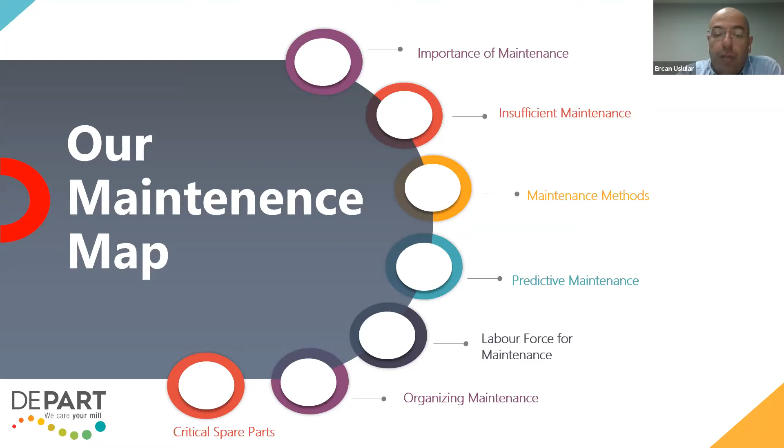What we are going to talk about today: we will talk about the importance of maintenance. Then we will follow up with what happens with insufficient maintenance. We will also talk shortly about the maintenance methods, which you all already know. And we will focus on predictive maintenance, our main topic, and also the effect of spare parts, labor force, and organizing the maintenance.

When we speak generally about maintenance, as you all know, it plays a big role for a company, both for production efficiency and from the financial side. Especially breakdowns for the technical teams. Breakdowns are our nightmares. As technical teams, when an incident happens, we are always trying to fix the incident on the machinery as soon as possible. But on the other hand, while we are focusing on that point, the management side always looks at the financial losses because of these breakdowns.

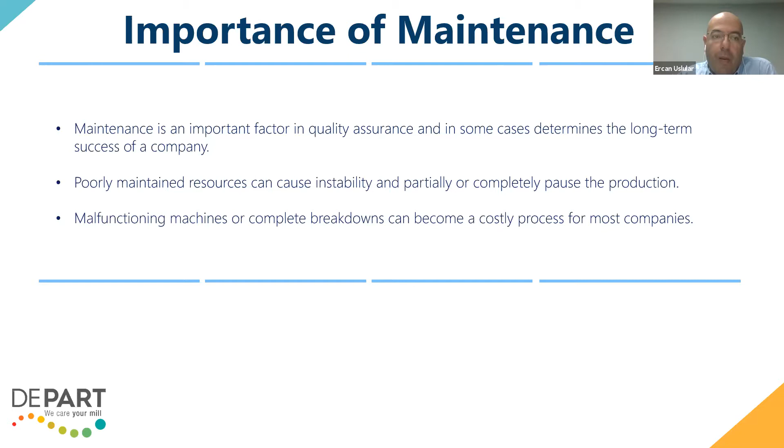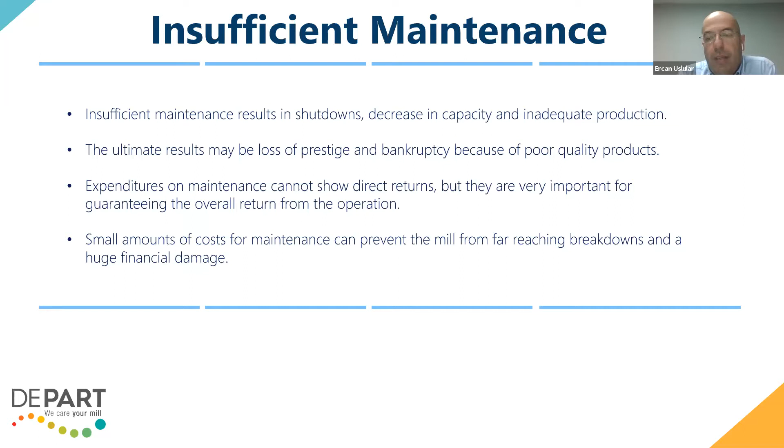And when you look more specifically at these incidents, you will see that these breakdowns mostly occur because of insufficient maintenance. And yes, maintenance is a cost point. We are always spending something, but we should not expect that the cost spent on maintenance will show us direct returns.

I will just give an example of insufficient maintenance. As you will see on the screen, there are some rollers which we have taken from different mills during our checkups. And as you see, there is some wear on the rollers. During this checkup, we directly make some reports. And in those reports, we basically mention that for these cases, at that wearing level, they should send the rollers for fluting.

Otherwise, if they keep using them, the wear level will increase so much that you will not be able to use these rollers anymore. And this will help you to reduce your preventive maintenance costs. It is just an example, just to make it clear.

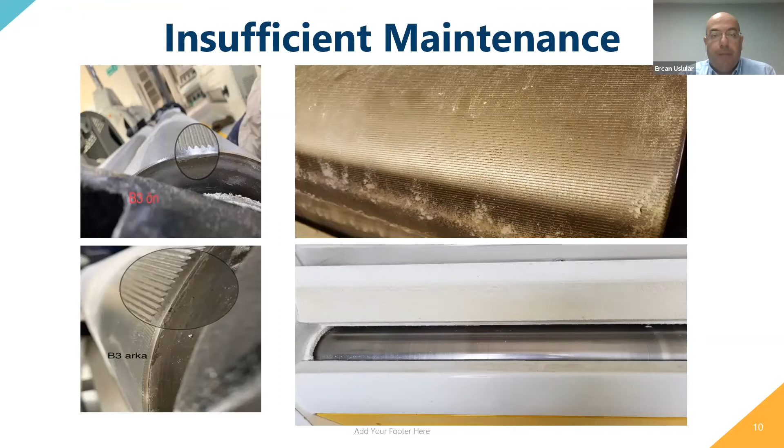Let's go a bit more detailed with the maintenance methods. In some articles and searches, you see different naming for the maintenance types. Actually, maintenance can be divided into two parts: reactive and proactive. Proactive is also divided into two parts: preventive and predictive maintenance.

We will also focus on predictive maintenance, but in some articles there's also different naming. For example, reactive is called failure-based, preventive is age-based, and predictive is condition-based.

After some research, results show that for reactive maintenance, you are too late for the incident, and for preventive, you are too early. Why is predictive so famous at the moment? With predictive maintenance, you are right on time.

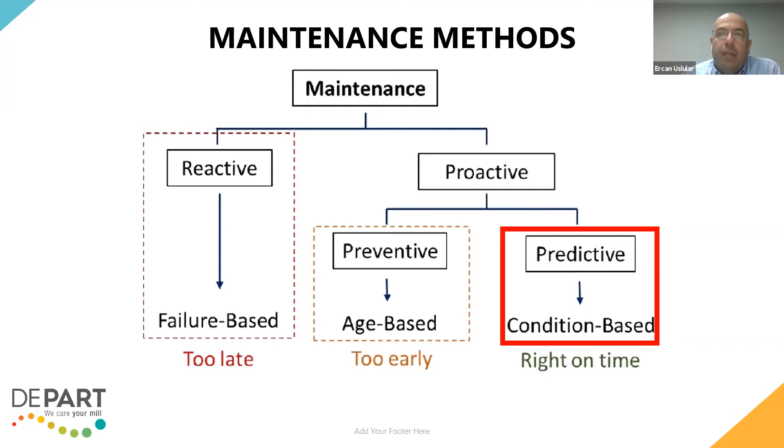So here's something about the terminology. I put this on the slide because I was surprised when I read that this terminology began in Turkey in 1988. I was really surprised, because nowadays it's very famous.

In 1988, one professor named Mr. Kubilay Köse announced this in Turkey as 'kestirimci' - this is Turkish, but it means predictive maintenance. Maybe in those days, people didn't take it as seriously as today.

So we say predictive this and that - what is predictive maintenance? Maintenance is monitoring the data taken from the machinery to detect possible breakdowns and prevent downtimes caused by unknown and unplanned maintenance activities.

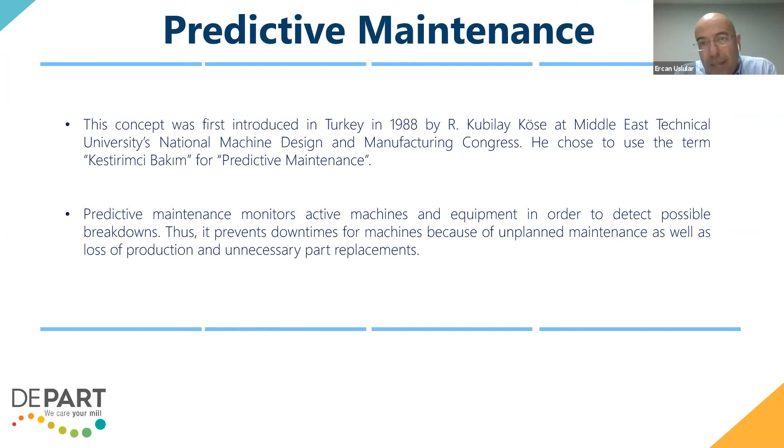Before getting to the numerical analysis, I read an article from Steve Carr. He made some surveys about predictive maintenance and maintenance issues in general, and mentioned that in one survey, the actual cost for a breakdown is between 4 to 15 times the maintenance cost.

He also says in another survey that the cost for a machine breakdown is not only the cost of repair. As technical staff, we only calculate the repair cost, but the stopping time, the inability to produce product, and financial losses should all be calculated in that cost. When we look at some academic analysis, we see percentage reductions.

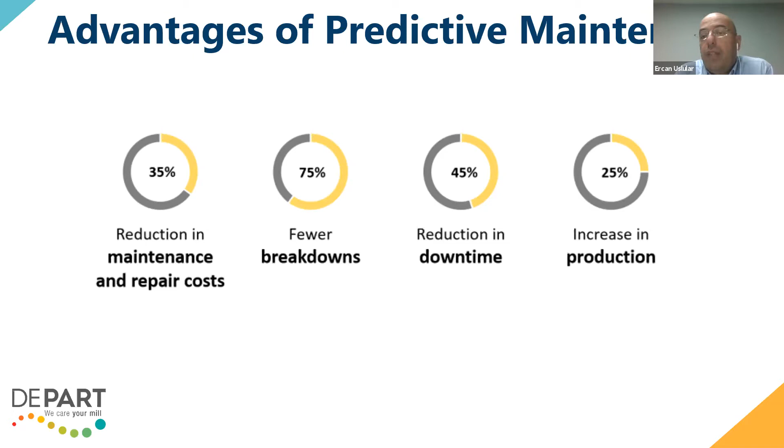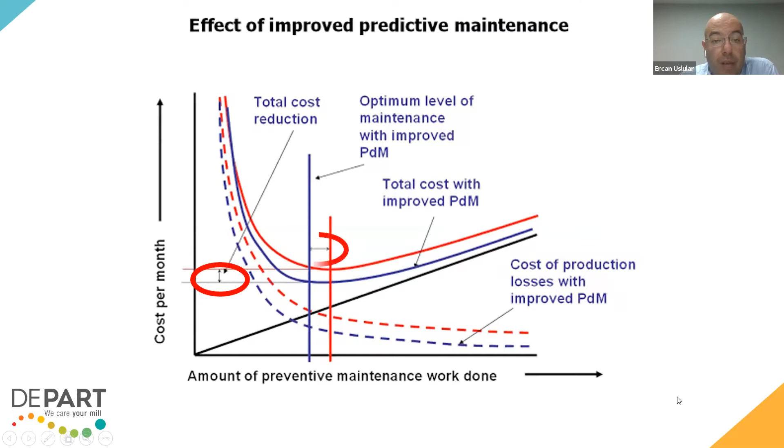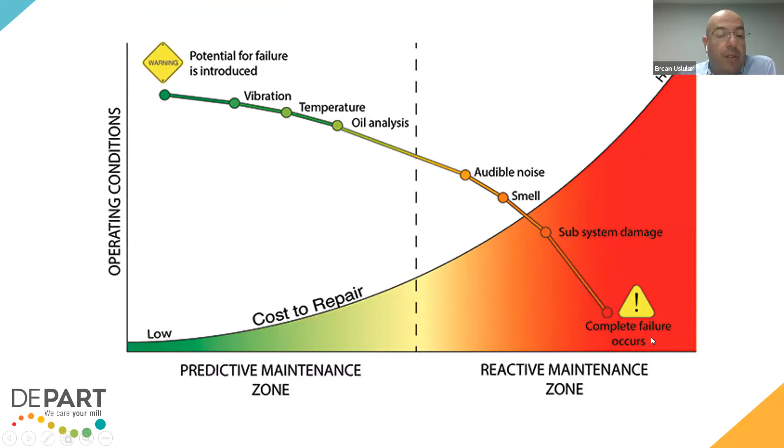When you go further and it goes more deeply, you start hearing an audible noise, maybe a smell, and then it damages not only the parts but also the subsystems, and complete failures occur. So I'll give you a simple example: in your mill, the plansifter has a top bearing.

You will increase the lifetime by observing such data, vibration, temperature, and if there is a needed change, then you will change only the bearing with a minimum stopping time. Approximately, just to give an approximate value here, the bearing and the labor will cost you approximately 400 euros.

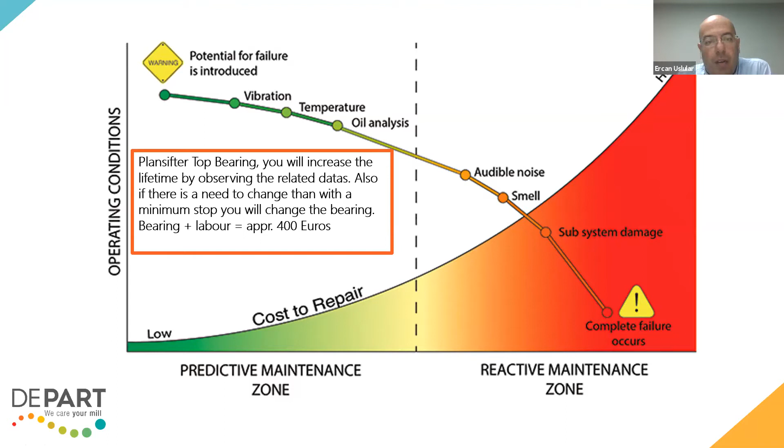But when you do not observe the data, then the bearing will damage. It may also damage the housing, maybe the main shaft, etc. It will be a follow-up, so surely you will go to bearing, housing, labor, and then you will have more than 1,000 euros cost.

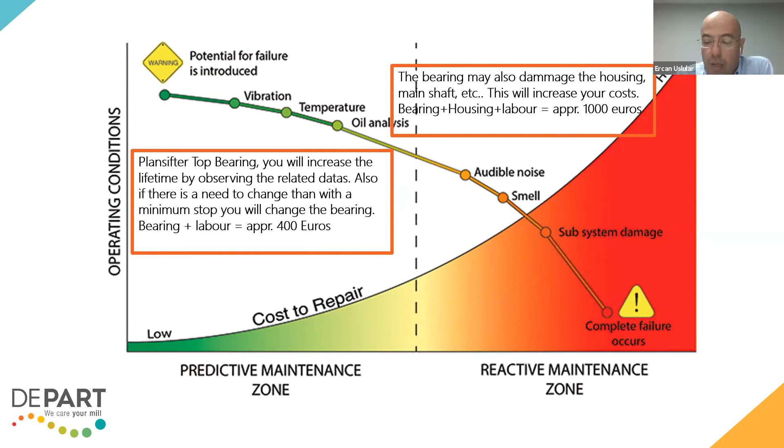And you will see also in the graphic, I mean predictive, when you apply predictive maintenance on your mill, surely you will save lots of costs from the financial side.

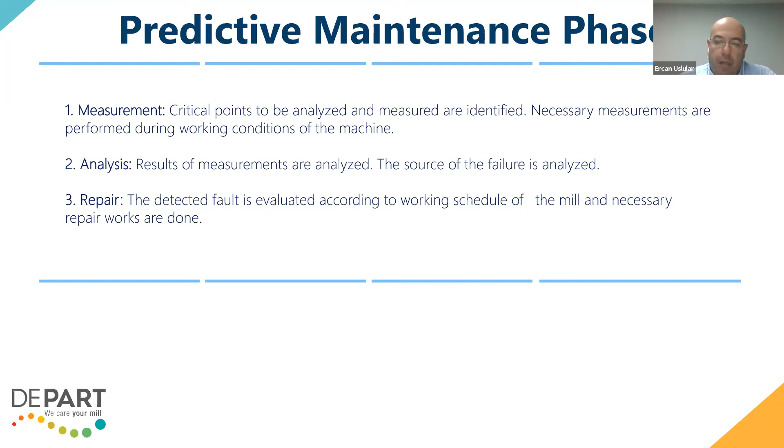So let's create our predictive maintenance. Predictive maintenance actually has 3 steps: these are measuring, analyzing, and at last repairing or maintaining. So first of all, here's a sketch.

First of all, you should decide which equipment or machinery you are going to monitor. After that, from this equipment, according to its characteristics, you should decide which data you will take, vibration, temperature, like this. And then you should start to begin collecting this data.

But only collecting the data will not be enough. You should process and analyze this. That's why your staff should be very expert on it. Then, after your collected data is logical, then you start your actions.

Actions means you start planning your maintenance. Also, in some of the mills or factories, they are using ERP on the system. And you can also, for example, store this data in a cloud or in your own server.

And after analyzing this data, you can make, via a program in the ERP, automatically give tasks to your maintenance team. They can give some, for example, you get a message: okay, go send to the night shift, this bearing from this machine should be changed, like automatic messages.

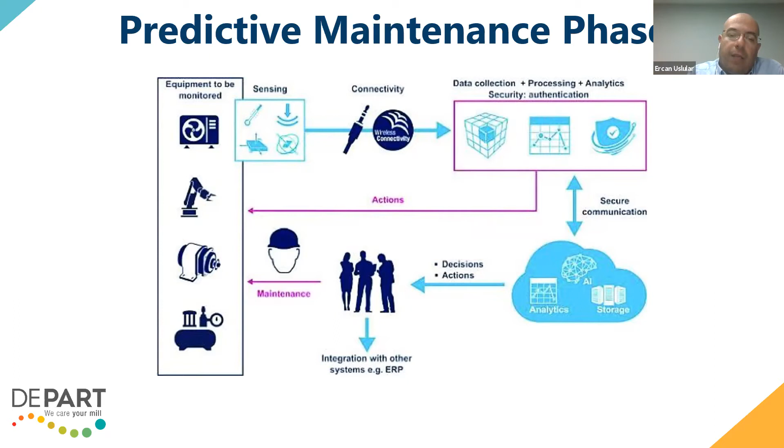So as I said, the labor force is very important. Why is it important? Because analyzing this data is not so easy. That's why if you do not have a sufficient team, you should consider outsourcing the support by making some service contracts. And also your teams, if not well qualified, you should train your team.

Training your team is very important, and the level of training is very important. You should follow up closely on these trainings.

And as I said, if you are not able to make this analysis for the predictive maintenance, not only for the predictive maintenance, maybe sometimes with your team you are not able to reach the speed for the stopping time for the maintenance. That's why you should make some service contracts for making your life easier.

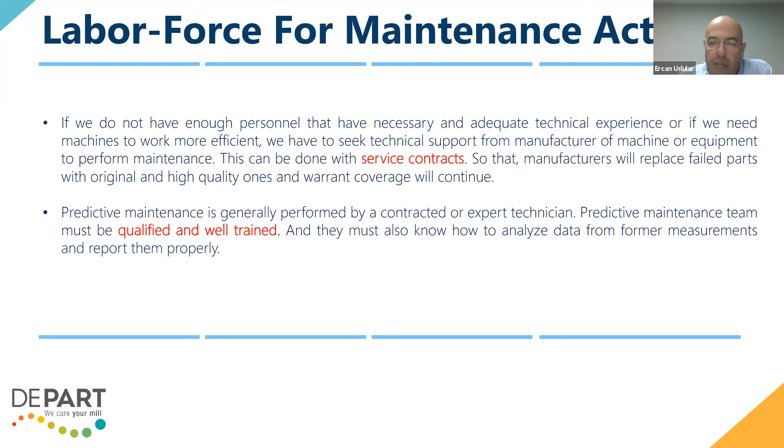So we decide which equipment we are going to monitor, we analyze the data, and now we will go into the action.

Firstly, we should make a maintenance schedule, an inspection schedule. Then for each machinery we should prepare some reports, some forms. In those forms should be written the specifications, manufacturer's data, etc. Also related with the equipment, we should keep from the manufacturer the spare part catalogs, user manuals, maintenance manuals, if there are, just for making our maintenance team's life easier.

Then this can be the production manager or the maintenance manager, it depends on who is dealing with the maintenance issue or who is reporting these maintenance issues. That person must keep records of each inspection result and part replacement during the works.

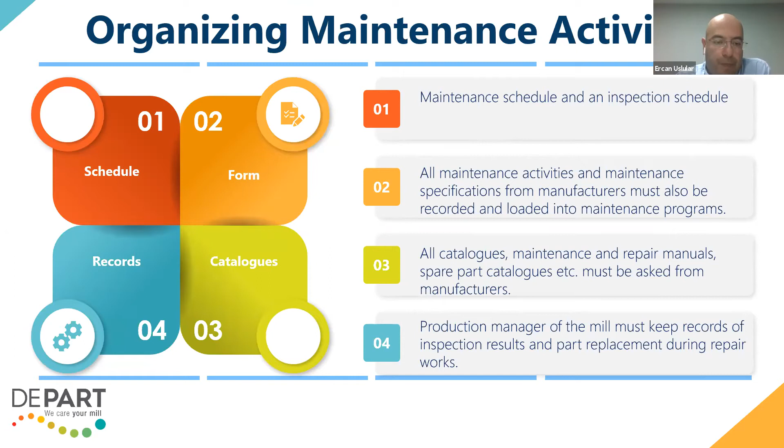So, actually, before I give the microphone to Mr. Sercan, this was a really short and brief explanation about predictive maintenance. I would like to say, as a result of this, the cost of downtime has a big impact on profitability. World-class companies are already implementing new service business models to change the maintenance system into predictive maintenance. I want to just inform about this.

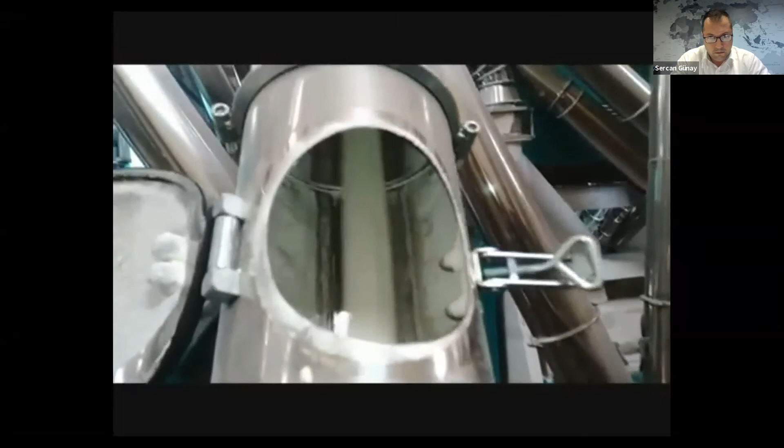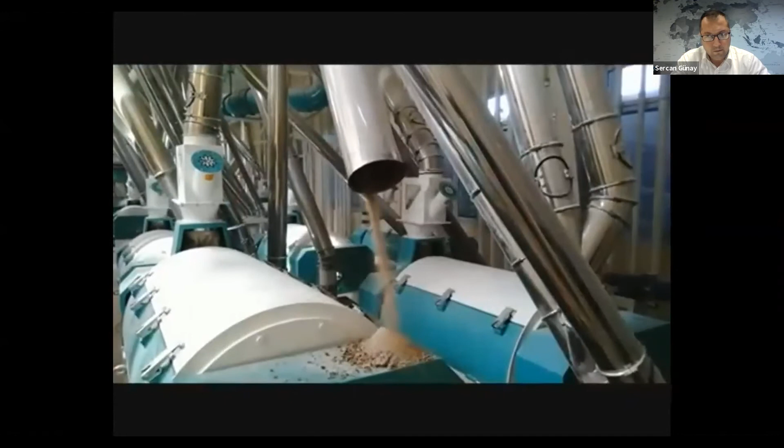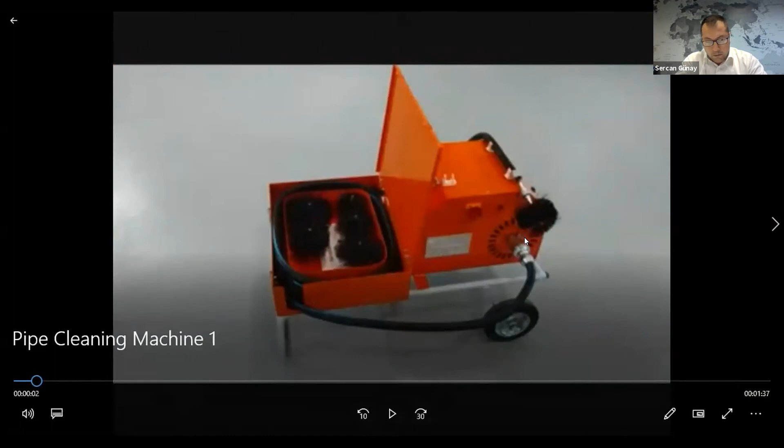So this is our pipe cleaning machine. This machine can clean pipes easily up to 8 meters.

Maximum cleaning diameter is 30 centimeters. Along with this machine, we supply 3 soft and 3 hard brushes in different diameters free of charge. If you have any interest in this machine, please do not hesitate to write us. I would like to proceed with our other video for the jet filter sleeve cleaning machine.

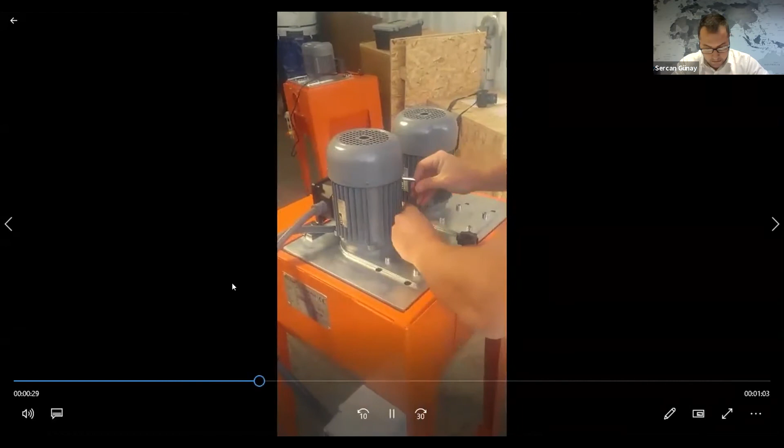So this is to adjust various sizes of brushes into the machine.

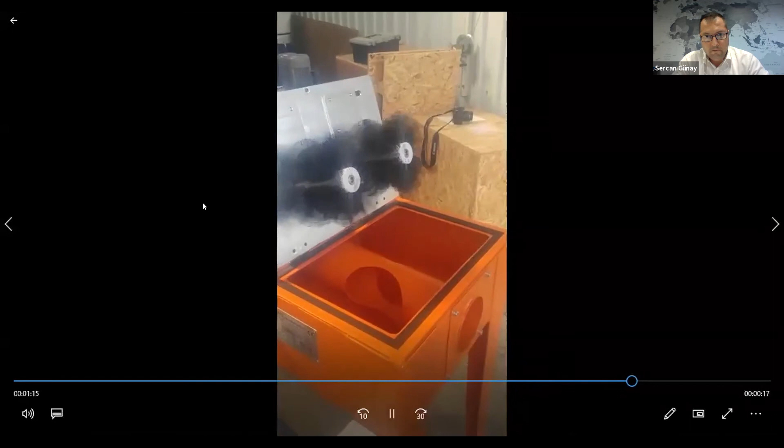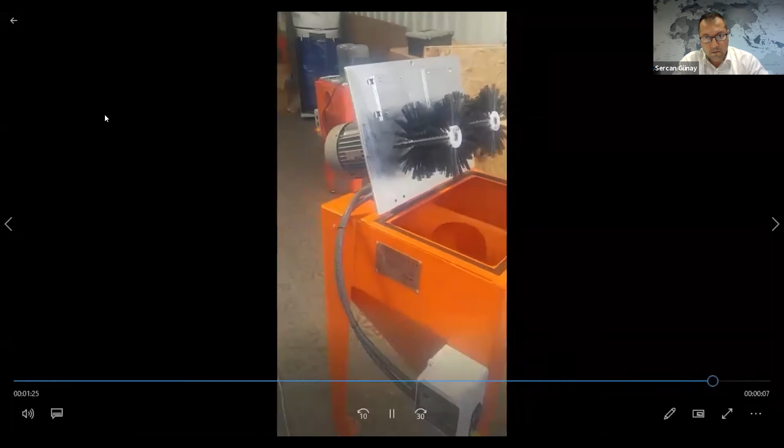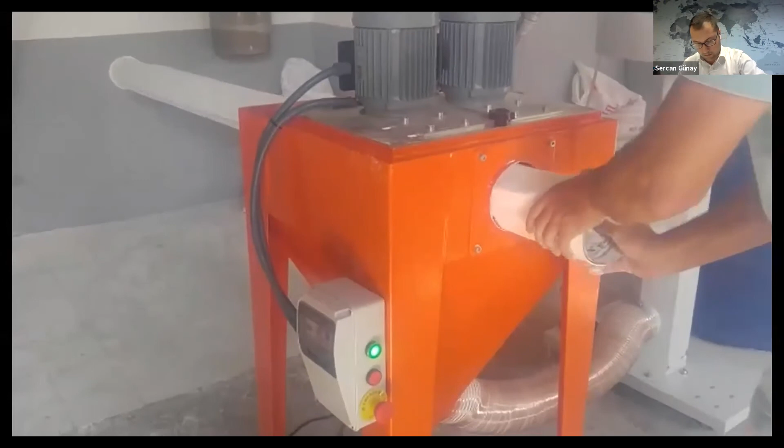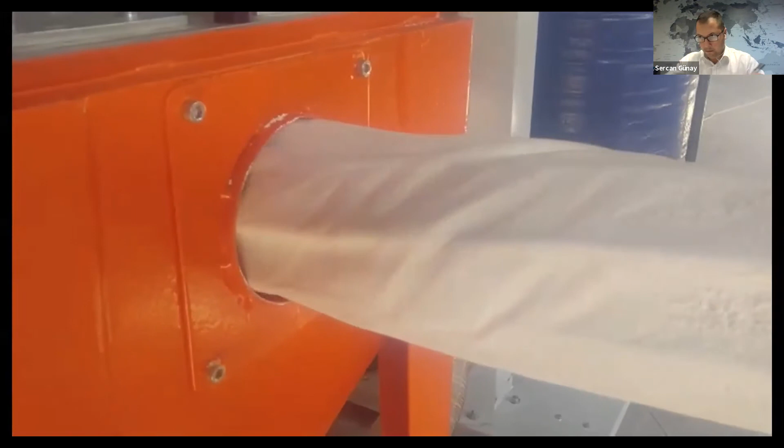One last video. It has dust-free cleaning with a separate dust absorption unit. The blue one, on the right side, is a dust absorption unit, so you can clean your filter sleeves with dust-free usage.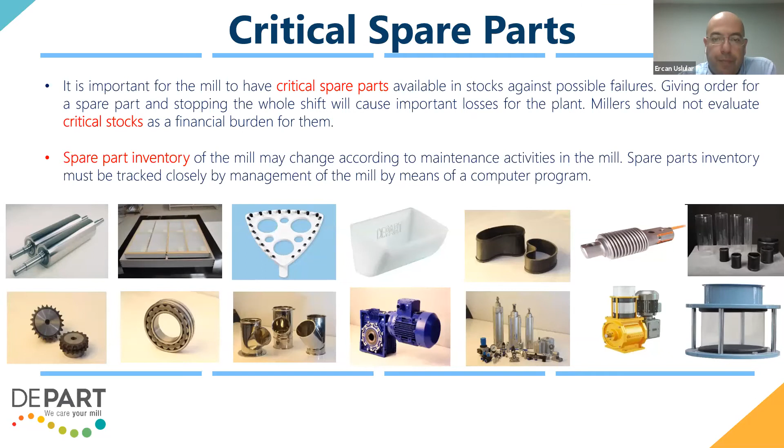So let's talk about and announce our new remote control program, which we call DIOS - Depart Intelligent Online Solutions. It's the first of its kind.

As you know, because of this pandemic situation, we are not able to visit, not only us but also you, your factory, or your customers so frequently. When there are breakdowns, we try to connect via WhatsApp, TeamViewer, Teams, Zoom, and other different programs, but each program has some missing points. That's why we decided to develop, especially for our customers, our new program DIOS.

With this program, we are able to give technical support by identifying issues more quickly and resolving common technical problems from afar. For field services, for example, assistants put all necessary data and instructions directly in the hands of the technician in real time.

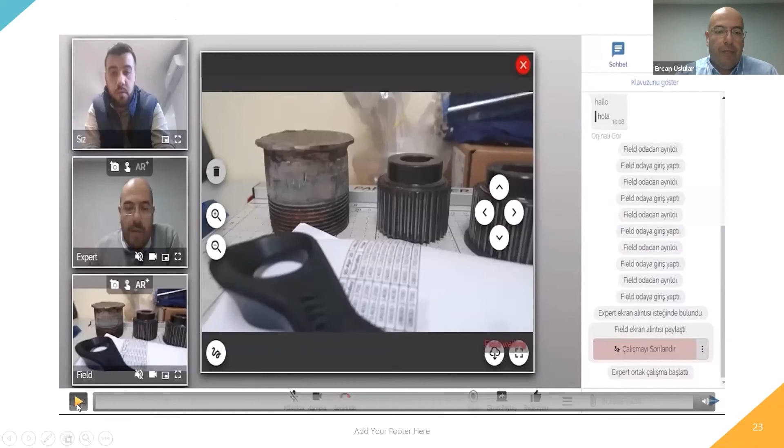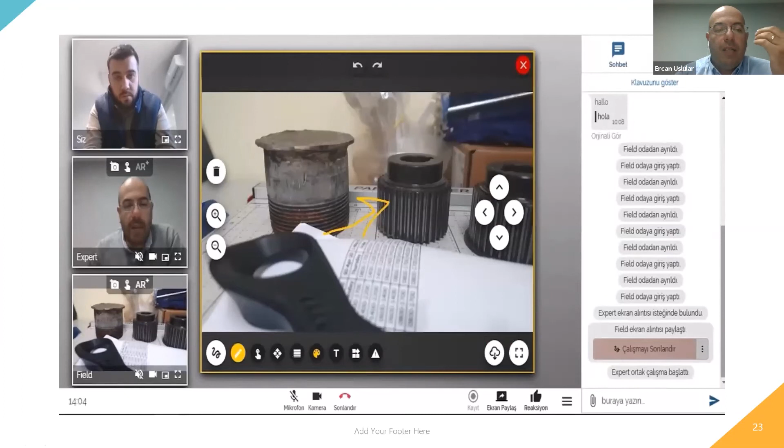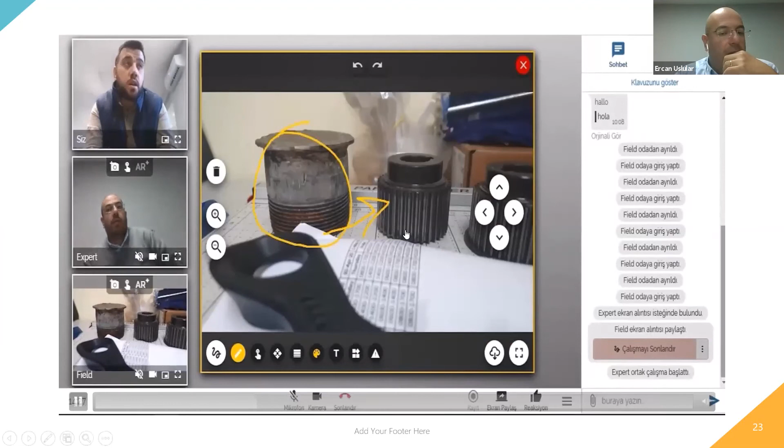As you see, sometimes, for example, when you do it with WhatsApp, the customer is telling you something, but you cannot imagine it. That's why we are connecting directly to his mobile phone via an application. Then we can ask directly by marking the parts, or he can make some notifications, this part, this section, as you see on the screen.

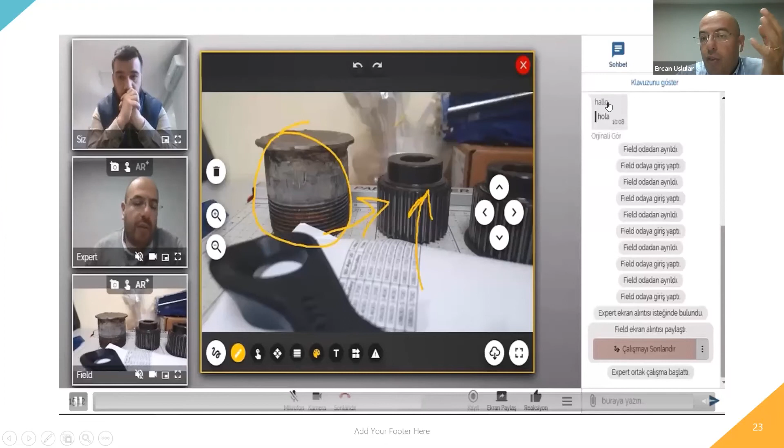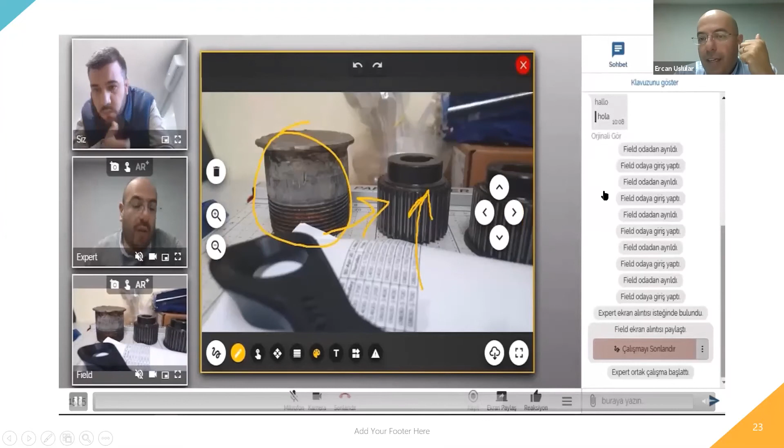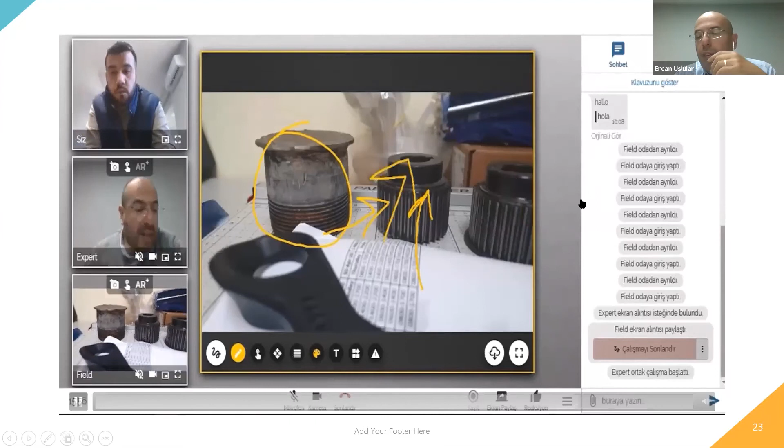Also, when you look on the right side, I have written in German "Hallo," just for test purposes. The other side set it to Spanish, so when I write "Hallo," he directly sees "Hola." This is just a sample. From the adjustment side, as I said, you can adjust more than 60 languages.

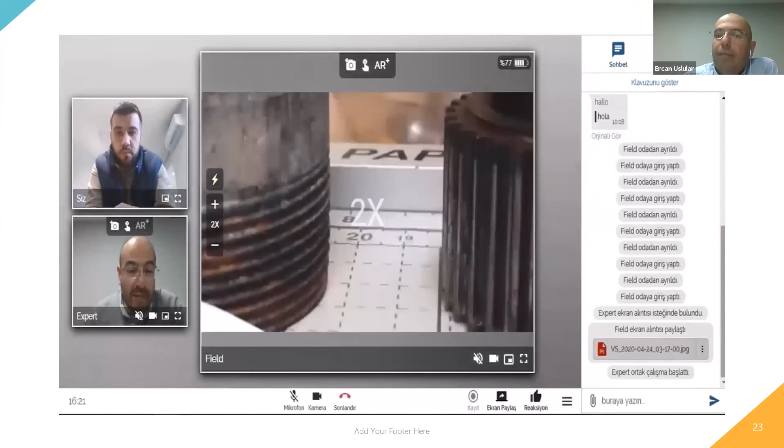Also, sometimes when you are not able to see, you can manage his cell phone. You can zoom it, and you can also turn on the flash. Sometimes it is so dark you are not able to see it. You can zoom in, zoom out, and you can manage this also. And you can take recordings with his cell phone.

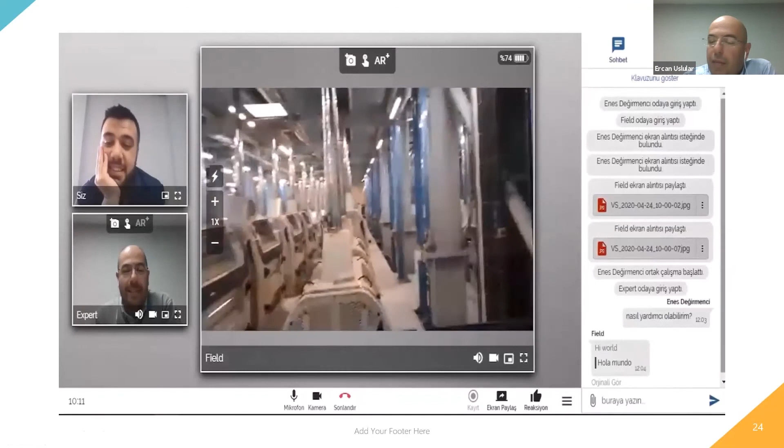The second video we have is from another project we are just commissioning. We are also using this on our side as a commissioning tool. As you know, because of the pandemic, some of our colleagues traveled abroad. They were not able to come back, and sometimes they need some technical help. And our colleagues can, with this program, our remote program DIOS, also share their videos, for example. And when we need some explanations, we can call them.

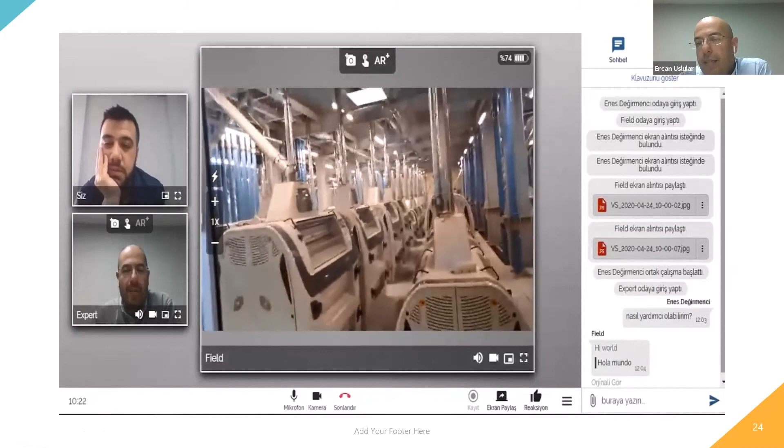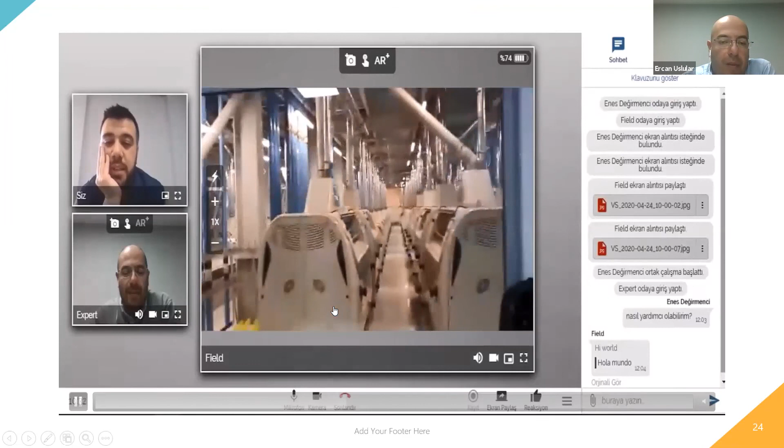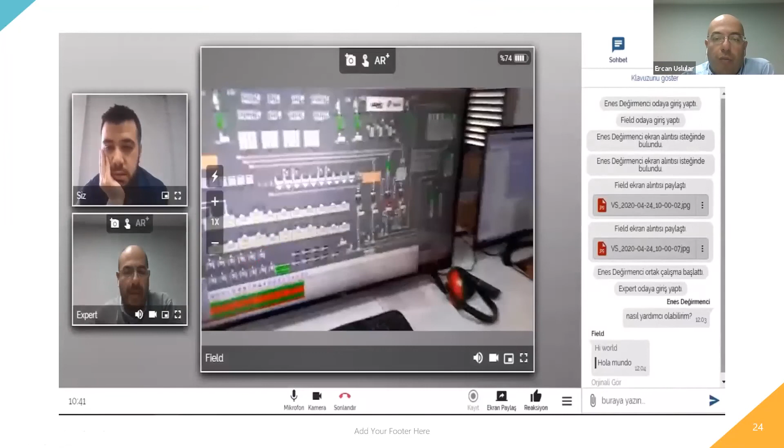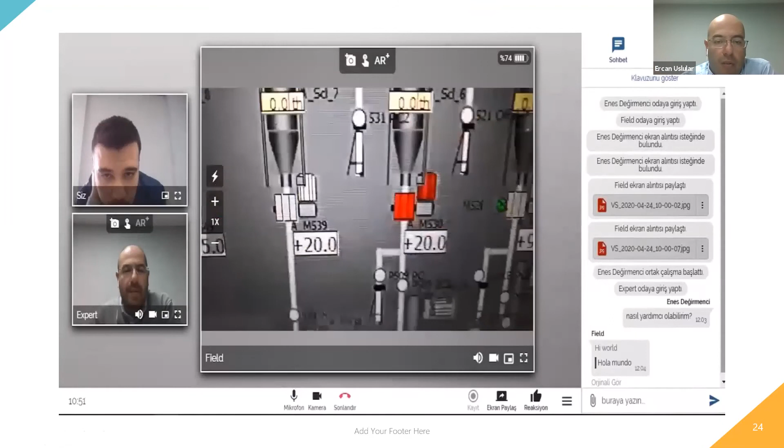It's like live chat, but as I said, you can also mark some points, and it makes finding the solution easier. When you call, for example, they say on the SCADA, I could not see this, I could not see this. Now I tell them, okay, where is this point you are talking about. Also, you can then make a screenshot and say, okay, open this valve, close this valve.

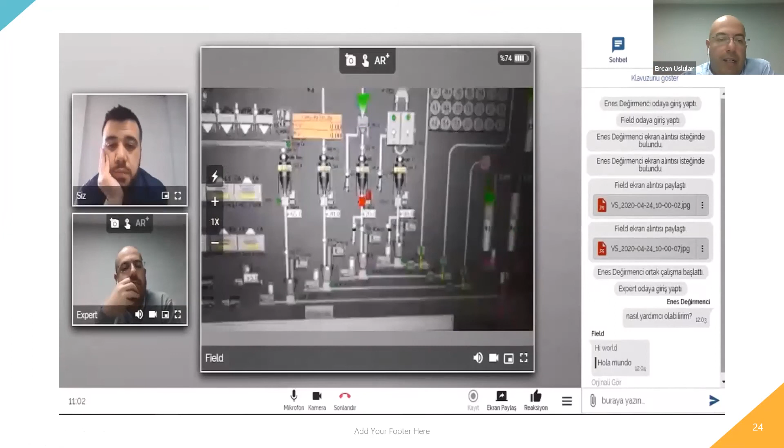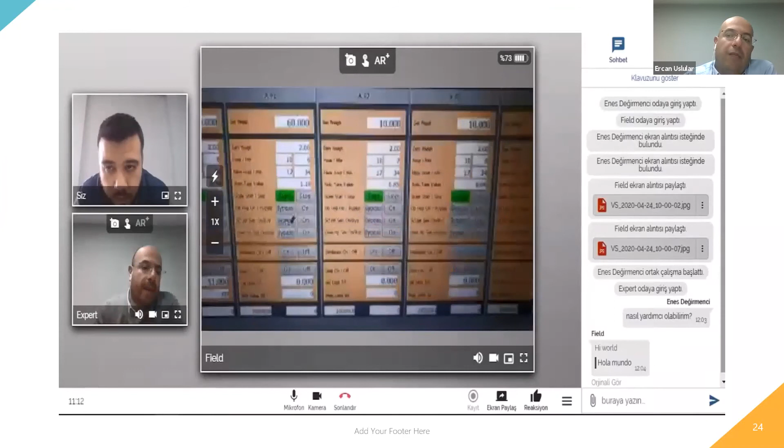What I'm always trying to say is, it's not only from the programming side. Sometimes, for example, for calibration or some fine adjustments, with this tool you are able to find the solution and have a better service. I hope this has been a bit informative for you.

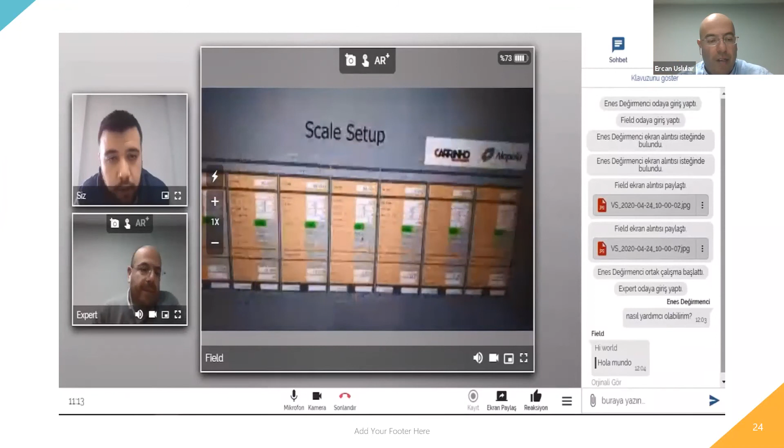So now we can continue with the questions and answers. Let's have a look at what's coming up. The first question is: Mr. Ercan, why is the customer satisfaction only 82.6? Can you promise, for example, 90, so that we may be more confident? May I answer this question, please? Yeah, sure. Please, Mr. Serjan.

The second question is: do we have a maintenance team to execute maintenance activities in factories in the Indonesia region? I think you should reply. Yes, in many countries we have some agents, and we also have some agents in Indonesia. For example, we did some warranty works through this company, and sometimes when we request, they also come and visit the factories in Indonesia.